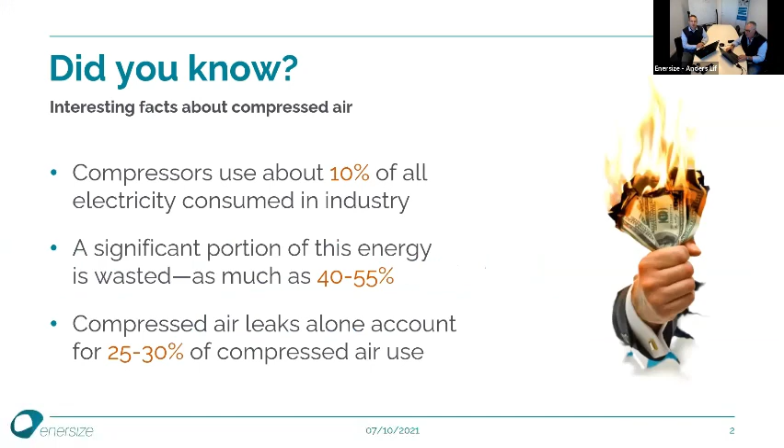So, did you know that more than 10% of the industry's electricity consumption is used to generate compressed air? And if you add to that the fact that half of that energy is wasted, I think you're starting to see that there is a huge opportunity. The facts that I'm talking about, it's not something that we are making up at Enersize. These facts are well established through research. For instance, the US Department of Energy estimates that as much as half of the energy to compressed air is wasted. And this situation is the same anywhere around the world.

Our customers, they are often in a situation when they need more compressed air to maintain their production, because compressed air is usually critical for production in the industry. And in that situation, the customer, the industry would turn to the compressor manufacturers asking for a quote for another compressor. And they, of course, would get that, and it would be at a quite high price, and the compressor would have a little bit higher efficiency than the previous one.

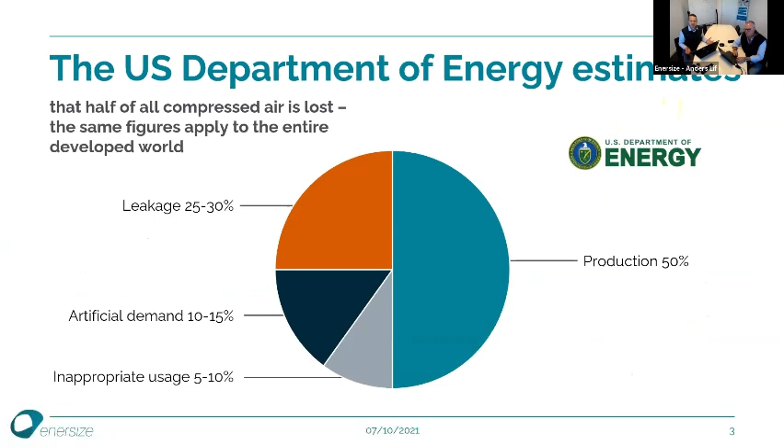But what we say at Enersize is that you really should look at all the energy savings in a compressed air system. The European Commission has produced a research report on this topic, showing that as much as 42% of the energy saving potential relates to reducing air leakages. And to spice this up a little bit, why would you buy more compressed air capacity when the air should not be generated at all?

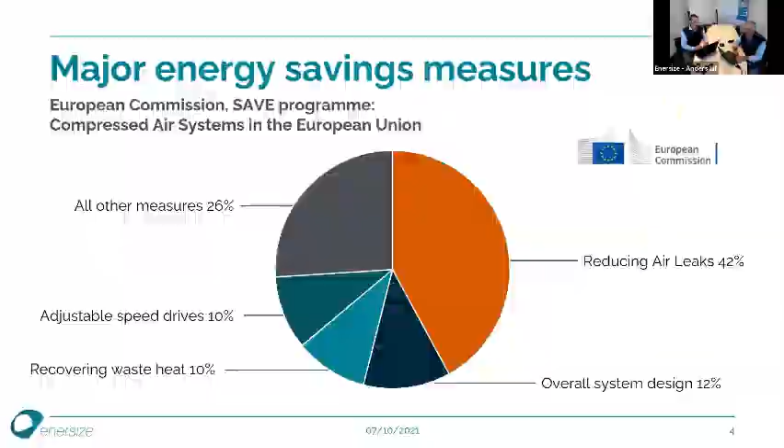Enersize, we are a startup, but we are built from a fusion of 3 Nordic companies with lots of experience from different kinds of energy efficiency work within the realm of compressed air. We are not aiming to become a company with a large service organization. Instead, we dedicate all our resources in building the best software out there for energy efficiency work within compressed air. So really, our software services are used by customers and partners to get their compressed air under control.

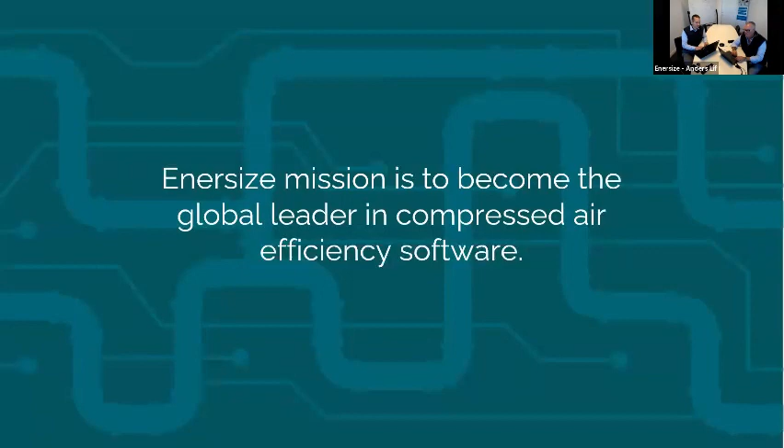We are developing our software independently of compressor manufacturers, and we are aiming to become a global leader in software services for energy optimization of industrial compressed air. Our parent company is Finnish, but we have subsidiaries in Sweden and in China. And we are partnering up with companies around the world. In India, we have eClouds and Mr. Shanta Kumar, who will be speaking, I think, after this presentation. And together with eClouds, we are involved in a clean tech program by the World Wildlife Fund through H&M, who are looking to improve energy efficiency in their supply chain.

So, Anders, why don't you talk a little bit more about what we do and how we work? I'm happy to do that, and thank you so much for having us on this event. We are very proud to be in India with you at the moment.

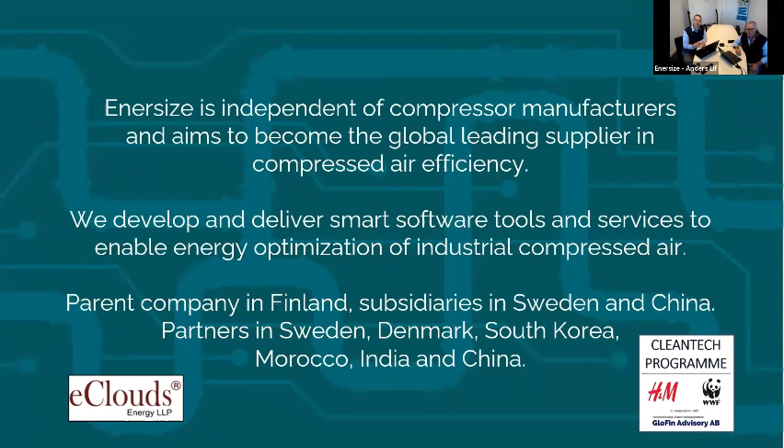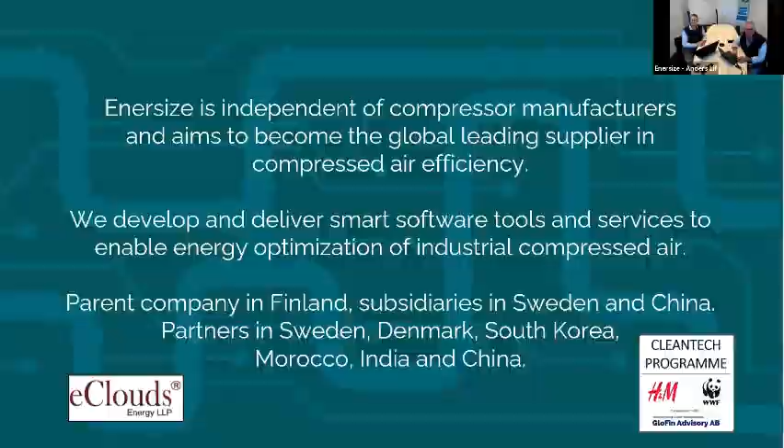I must say, I've spent my entire life in the industry. I've been in the asset-intensive industry, I've been in the manufacturing industry, and as you said in the beginning, I've worked in all continents. And I've still not met anyone passionate about compressed air before I met Enersize and our network. And that's kind of a surprise to me, because there is a fantastic energy gain to be found. But I also think that the interest is rising. And I think we can state that the time is now.

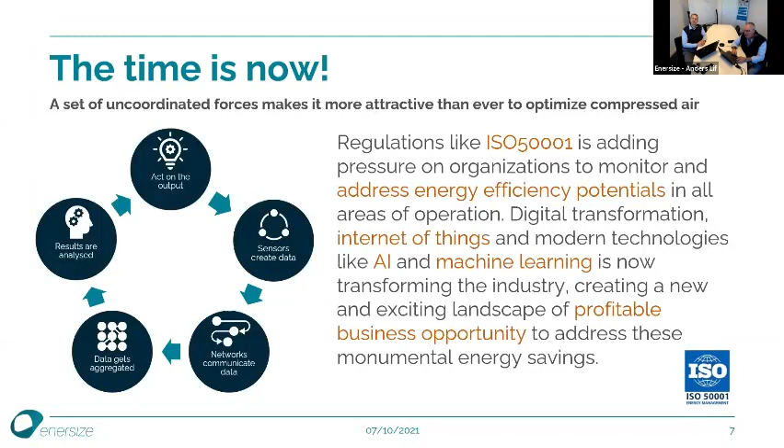There are many initiatives that are now coordinating an increased interest in addressing the monumental energy savings hidden in optimizing the compressed air usage. United Nations Agenda 2030 and the Paris Agreement, they are of course pushing for energy savings. And ISO 50001 is helping to identify and structure the work with energy efficiency potentials. And at the same time, the technology evolution, the digitalization, the Internet of Things, the Industry 4.0, etc., is making it easier and more cost efficient. So there has never been a better time to work with energy optimization of compressed air.

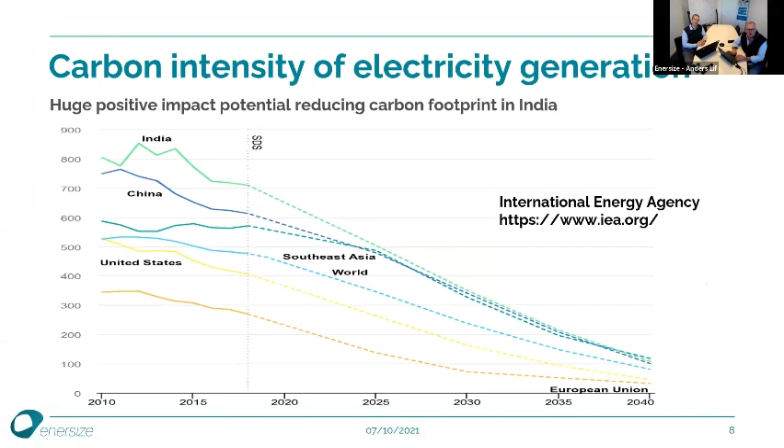The International Energy Agency, IEA, they are on a regular basis publishing the carbon intensity of energy generation in different geographies. And from these numbers, we can see that there is a great opportunity to lower the carbon footprint when improving energy efficiency. India is a region that has one of the highest potentials for reducing carbon footprint by doing energy optimization of compressed air.

So what we do is basically to help organizations save energy, and by that reduce carbon footprint. And we do this by making organizations aware of the savings potential in their compressed air system. And we move them from leakage levels that are often well above 30%. We had customers with 60% of the air produced being lost into leakage. And we help them institute an acceptable leakage level of always staying below 10%. And these projects, they have a very fast and very high return on investment, most of the time with under 1 year.

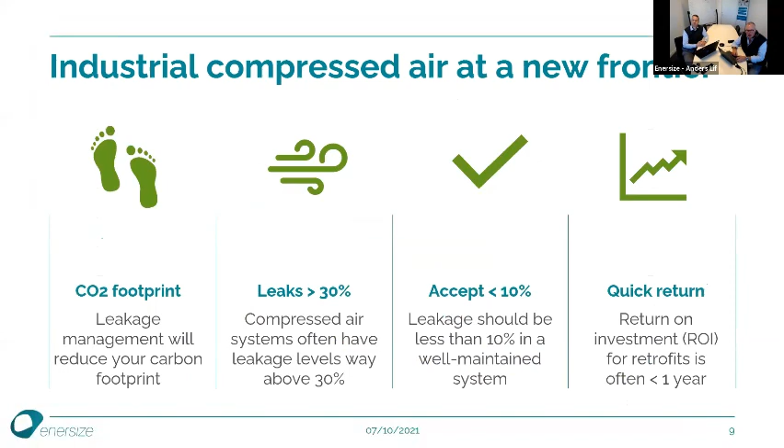In case you haven't really jumped in to study the cost of leaks, I took the liberty to present some numbers here. If I would take a needle and push that needle through a hose, I would create a hole that is less than 1 millimeter. I would probably not even be able to see the hole, and still that hole would cost me a couple of €100 every year. But that is not that remarkable.

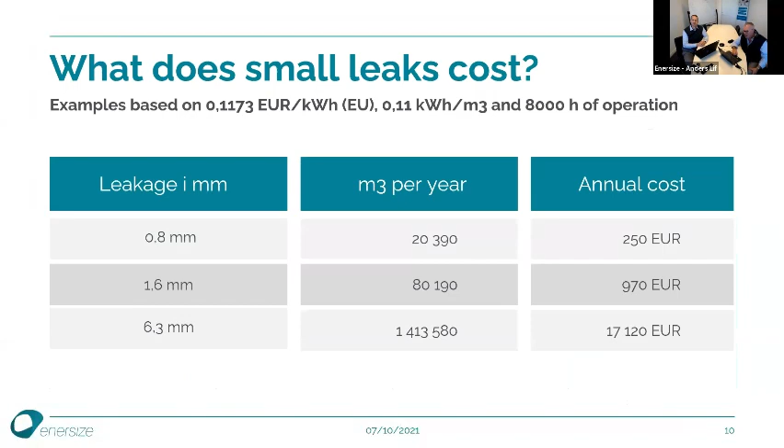What is remarkable is that if I expand that hole to just such a small diameter as 6 millimeters, the cost would be a staggering €17,000 per year. And this is from such a small hole. So the cost for leaks is high and the savings potential great when addressing them.

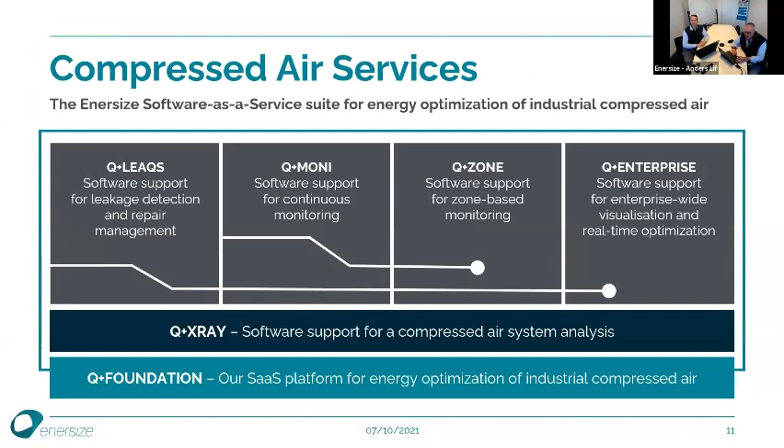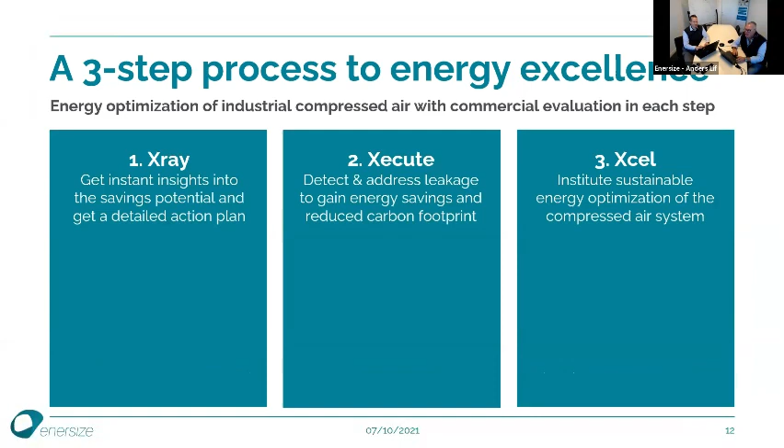To help address these topics, we have built a complete software as a service suite in the cloud, supporting all the steps in the change management and the work to deliver energy optimization of compressed air. Different modules support different steps. We have developed a 3-step process to find energy excellence, and we do a commercial evaluation between each step to secure project profitability for each customer. Each step is supported by the different modules in the portfolio. So let's look at how we do this.

We believe in data-driven decision-making. That is the foundation for everything we do. We start with what we call X-ray. We install mobile battery-driven loggers in the plant without harming anything, and we measure pressure, voltage, current, dew point, and flow, and we capture data with a 1-second resolution for 2 weeks. Then we upload the data to our cloud

database for analysis. With this, we are in a scientific way able to establish the true energy cost level for running the compressed air system of today. You have a baseline and a starting point based on real facts. We are also able to present the savings potential and a detailed action plan on how to reach that.

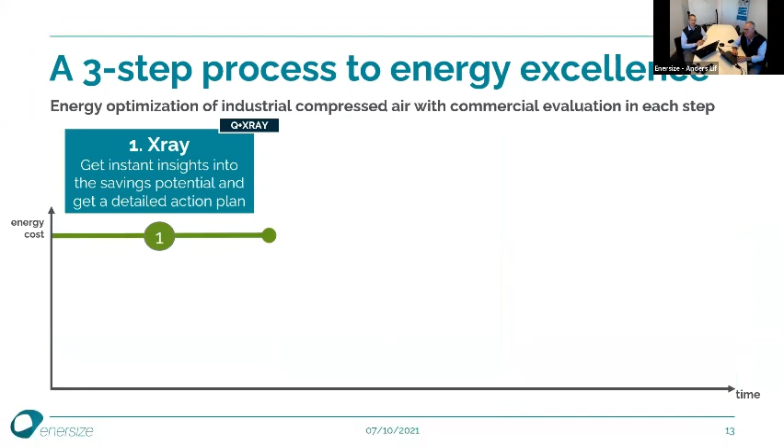In the next step, we carry out a leakage survey and a repair project, and step by step, we are reducing the waste. When the project is finished, we deliver a confirming X-ray using the same mobile loggers, once again getting a scientific definition of the new energy cost level. All in all, we call this service leakage reduction.

From this moment, many customers realize that they need continuous monitoring on the compressed air system to make data-driven decisions, and we help them to institute sustainable energy optimization of their compressed air system. This gives them an opportunity to monitor and maintain the new energy cost level or reduce it even further. We call this latter step energy optimization. And this is a never-ending story.

We know one thing for sure, and that is that leaks will come back and new ones will occur. The only way to keep leakage levels in control is to monitor and continuously act on maintaining the low leakage levels established.

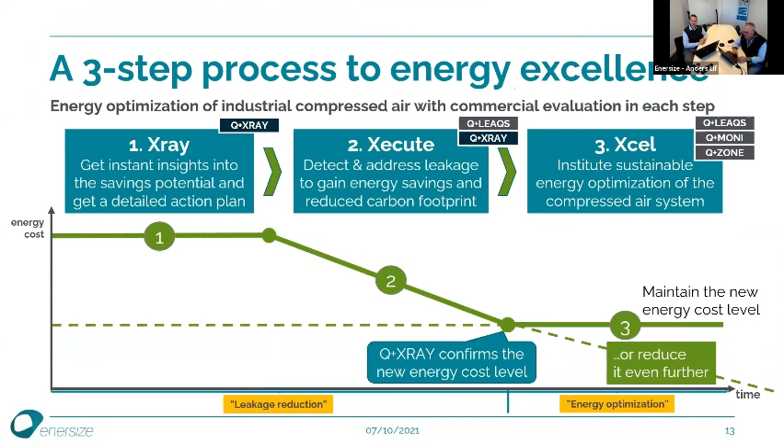Anders said that we are a startup, and a startup we are, but we are a startup that is the result of merging 3 different Nordic companies that have quite some experience. We have over 7,000 customer projects documented in our database, and we've had the pleasure to work with some of the most recognized brands in the world. I will just make one example here and ask Anders to present it, because he worked on the project in question. Thank you, Anders.

Yes, this is a Korean factory where we worked in the summer of 2019. Compared to what we have in Europe, this system is rather large: 4 megawatt installed compressor capacity and a bit more than 200,000 square meters of production area. In this case, the customer was already running our Q+MONI monitoring system, but they wanted to learn how to manage their leakage levels and keep them at a permanent low. So we trained the customer together with our partner, and together we put 10 technicians at work in the factory, finding more than 2,500 leakages in a bit more than a week.

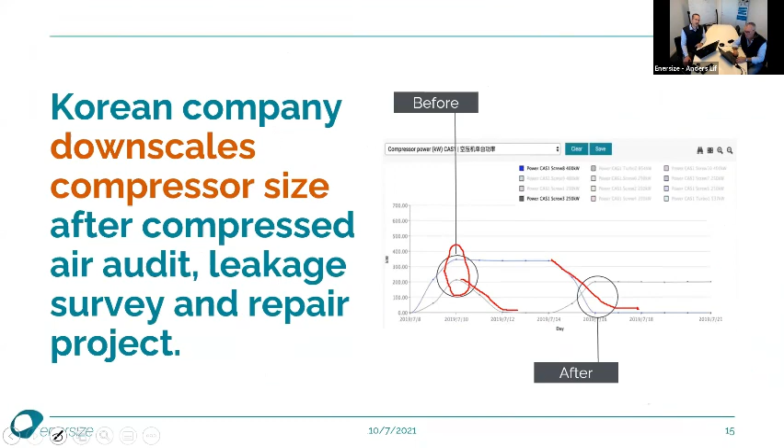In this particular case, we saved the customer 25% of their air demand, corresponding to 7,000 tons of carbon dioxide per year. Probably some kind of a world record, I think. We're quite proud of this.